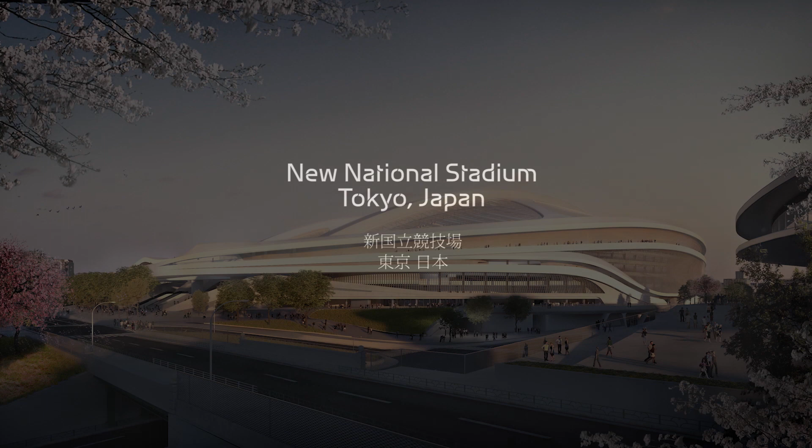One of the first shows we had done was in Japan 30 years ago. I think the stadium project is a very important project for Tokyo because that was done as an international competition, which we won. It was a very serious team of people, engineers and architects, who looked at this project for 2 or 3 years, so it's an enormous investment.

I think it's a very important project because it has a life beyond the Olympics, it has a legacy life. The team is a credible mix of international architects with sports planning and Japanese experience. Zaha Hadid Architects with Arup Sport won the international competition to design the new national stadium for Tokyo 2020 Olympic Games.

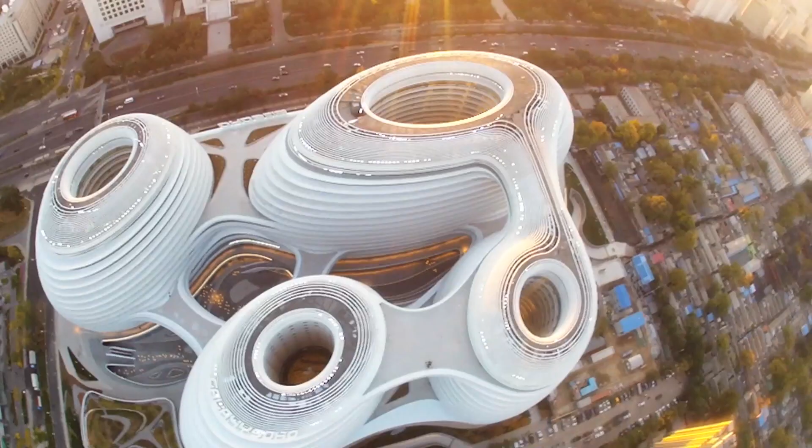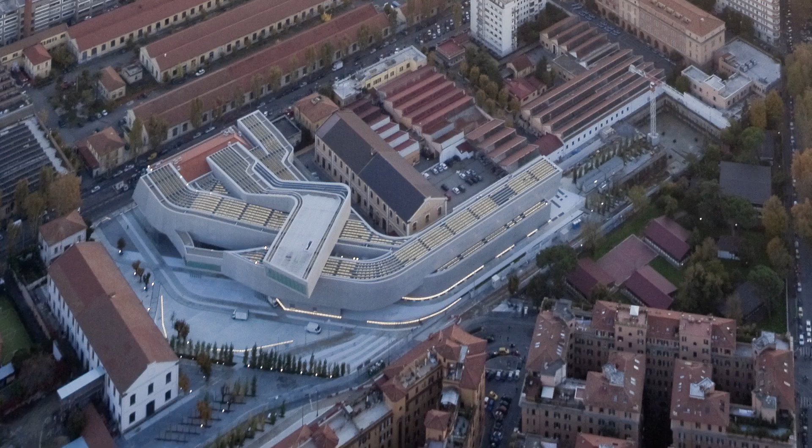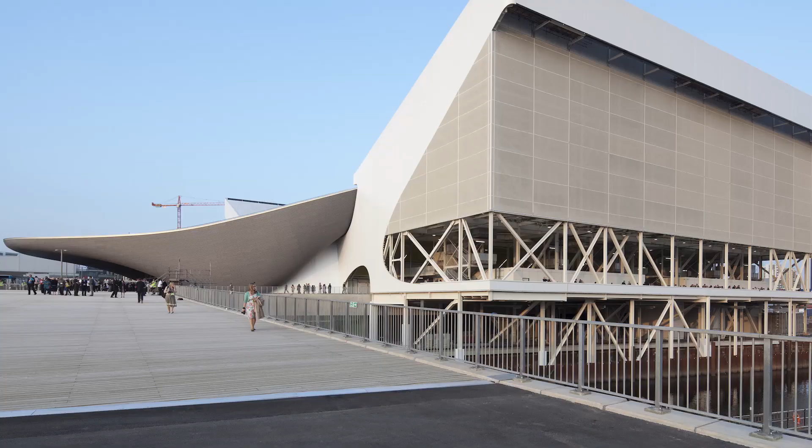ZHA have experience working successfully with clients to design projects which have been built on time and to budget. ZHA designed the London Aquatic Centre for the London 2012 Olympic Games. The project was successfully redesigned to achieve a revised budget. The design used a mix of temporary and permanent seating to become one of the most successful venues of the London 2012 Olympic Games. The venue has since become very popular and well used by the public.

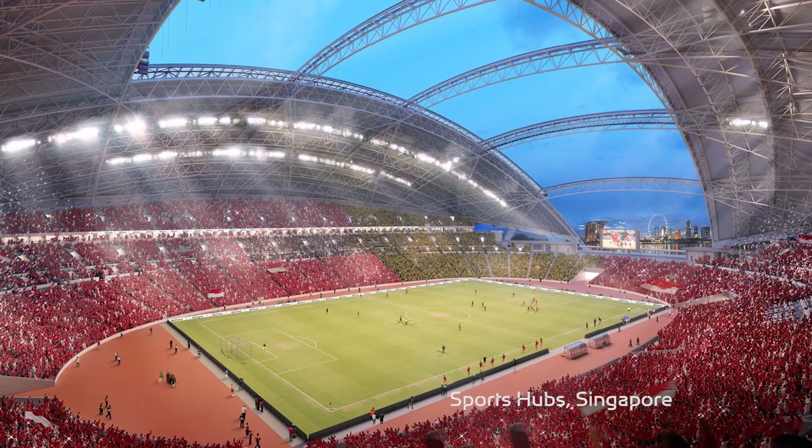Arup Sport have extensive stadium design experience, from the new multi-purpose stadium in Singapore's Sports Hub to the Beijing Olympic Stadium in 2008, the Allianz Arena 2006, and the City of Manchester Stadium 2002. We have been collaborating on the design with 4 of the largest design consultants in Japan, led by Nikken Sekkei. Between them, these Japanese offices have designed 3 of the stadiums for the FIFA 2002 World Cup in Japan.

The design was inspired by the past and future of Japan. The site is the site of the Tokyo 1964 Olympic Stadium, and it's an appropriate place to build a new national stadium which aspires to create a building that exceeds mere function to become a symbol of Japan's renewal and long-term optimism for the future.

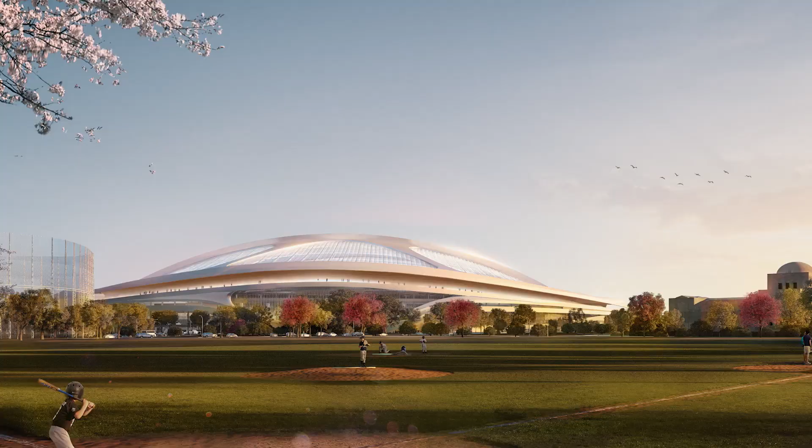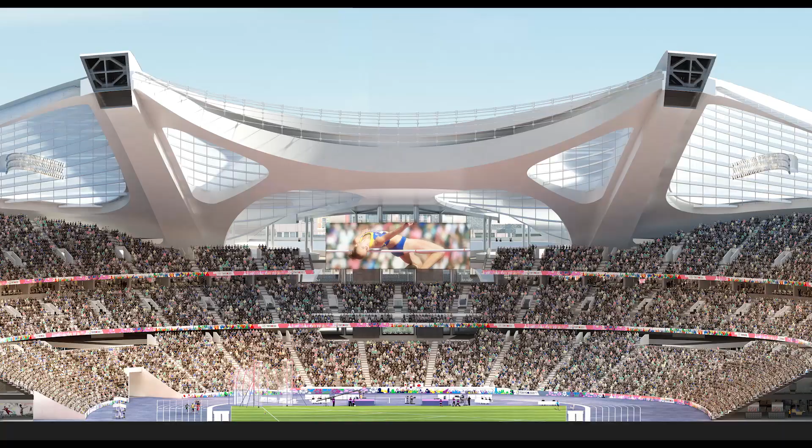The basic components of stadium design are extrapolated to connect the stadium to a specific context of Gaien and beyond to Japanese culture as an expressive but efficient design. The design is derived from the articulation of structure and circulation, where structure is required to create roof cover over long spans without columns, and circulation is required to safely move 80,000 people in and out of the stadium.

For practical reasons, the primary structure of 2 keel arches has a similar intent in silhouette and symbolism to traditional Japanese landscape bridges, so that the new stadium is based on a key motif from traditional Japanese landscape design and is an appropriate addition to the sports landscape of the Gaien area.

With cross ties, nature is further embodied in the design, where the expressed structure creates a distinctive flower petal geometry, so familiar in nature and to the Japanese public who have a close affinity to nature and the passing of the seasons. The flower petal geometry of the roof is continued into the facade, where the structure is not only expressed but inhabited.

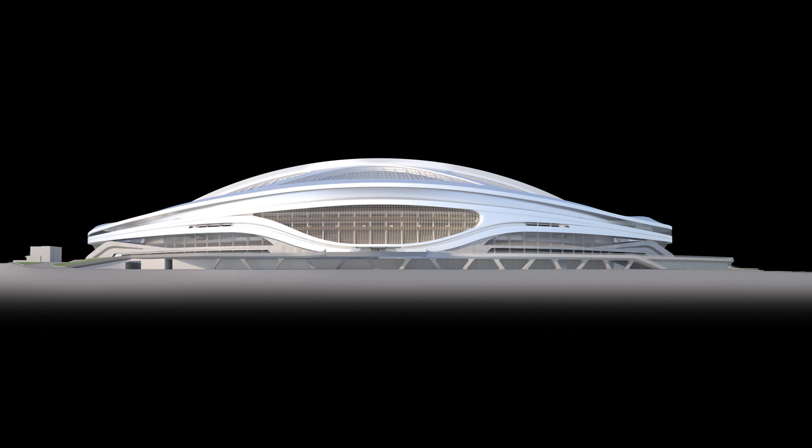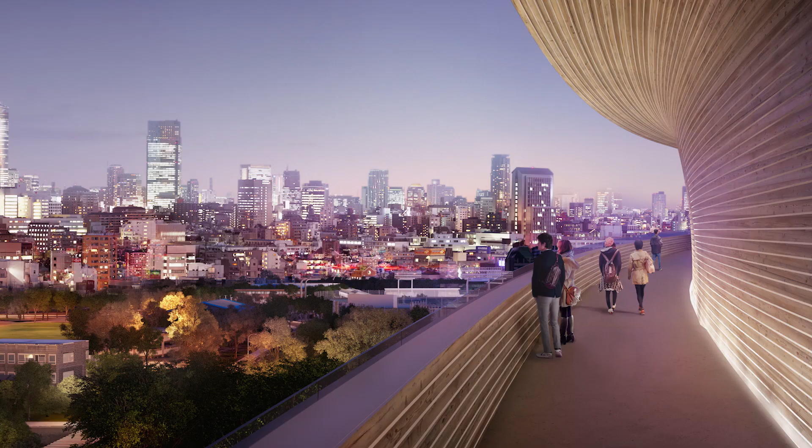A series of diagonal stairways and elevated walkways are developed into the envelope of the stadium so that it functions as a stadium on event days, and every other day it's an extension of the pedestrian landscape of the Gaien area, allowing extended walks and elevated views over Tokyo.

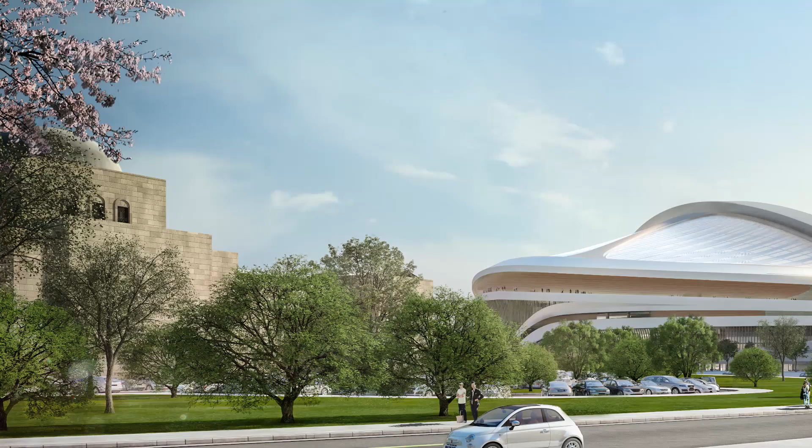All of these public walkways are lined with Japanese timber, giving a tactile familiarity to the stadium, which ties it back to the fundamental material of the Japanese environment and experience. The majority of the facade is broken down by the petal geometry and clad in Japanese timber louvers, so that the overall effect at pedestrian level is a subtle interplay of Japanese timber cladding, giving the visitor the experience of a direct resonance to the tree-lined landscape of Gaien and Japanese culture.

The majority of the roof structure is provided by catenary beams, which resonate with the innovation by Kenzo Tange with his catenary beams for the Yoyogi National Gymnasium. We aspired to make the new stadium connect visually and symbolically with this Japanese icon of optimism, so that Tokyo 2020 leaves Tokyo with a stadium as well conceived and as beautiful as this gymnasium from Tokyo 1964.

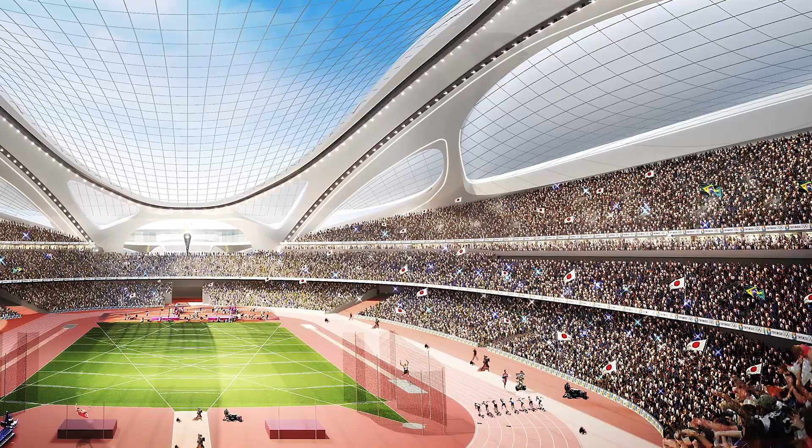The roof is covered in transparent, lightweight fabric. The roof allows daylight in, allowing good turf growth, whilst allowing spectators to experience the pleasure of daylight as they watch the events. At night, the stadium will glow and take on the appearance of a Japanese lantern. Together, the arches, catenary beams and lightweight fabric combine to create an overall effect that represents the traditional craft and modernist innovation of Japan, creating a renewal of the Japanese spirit of optimism for the future based on confidence in their past.

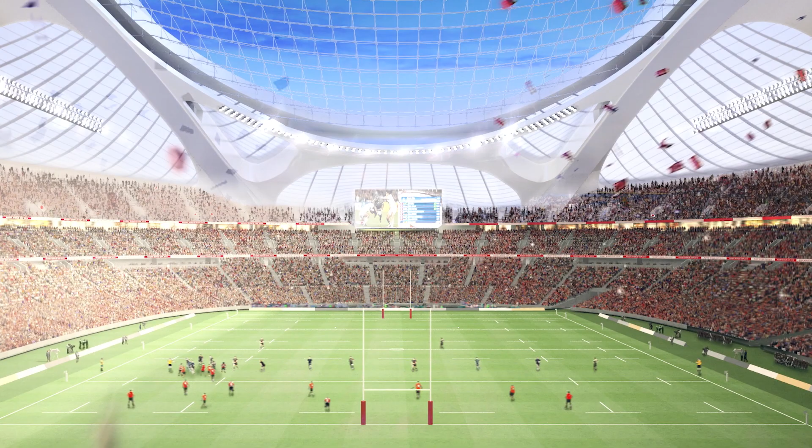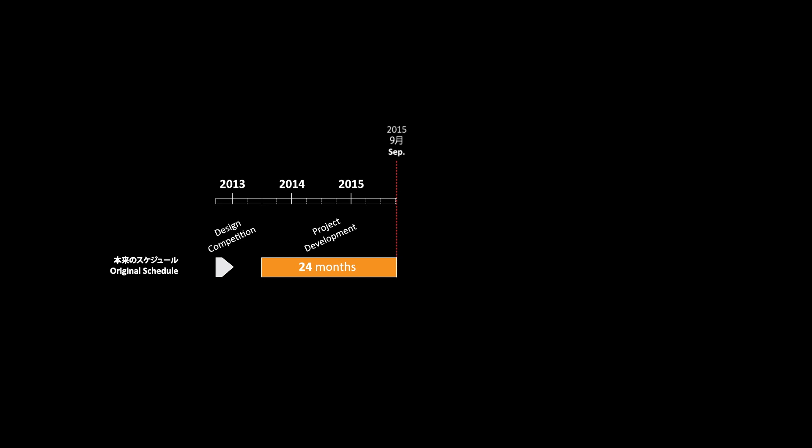Our new national stadium design has been 2 years in the making, and it is ready to start on site this year. It can be ready for the Rugby World Cup of 2019 and the test events before the Summer Olympics of Tokyo 2020.

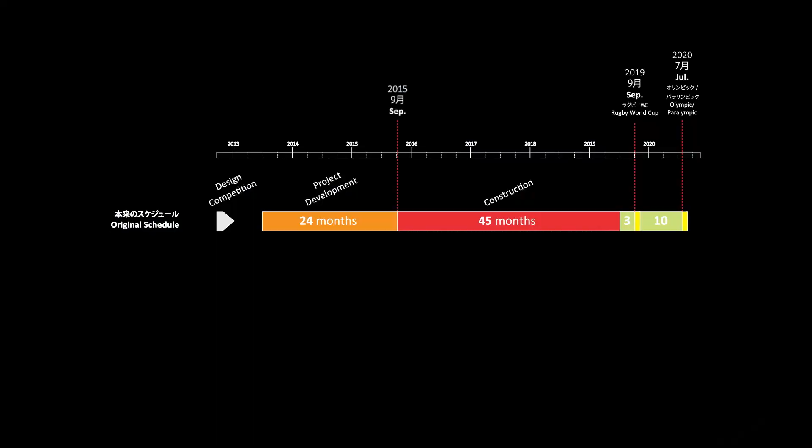To start the design from scratch is an unnecessary risk which we think the government should reconsider, if its aim is to achieve a lower price than 252 billion yen. We believe the answer is to introduce more competition between the contractors, but not to lose the benefits of the design.

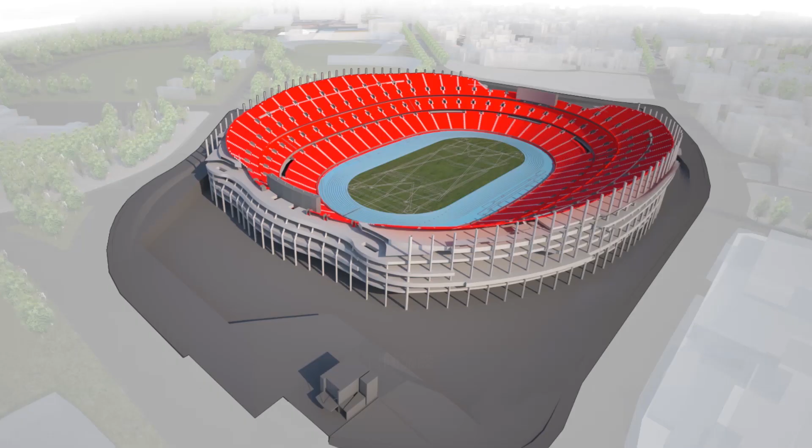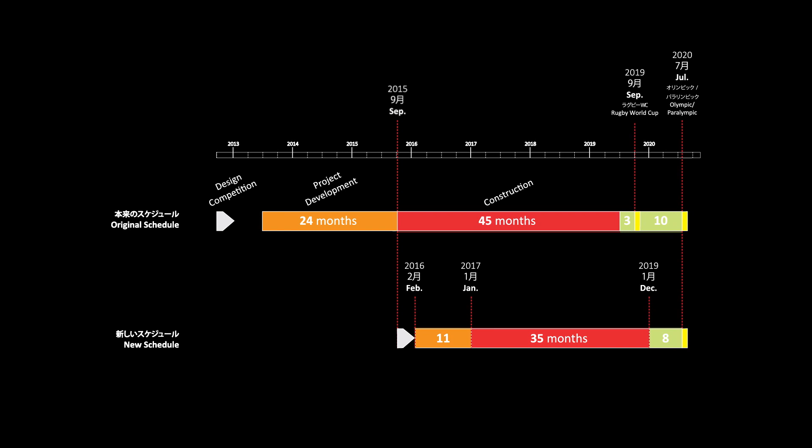The site is complicated, and the majority of the design will remain valid because the basic requirements of seating capacity and support facilities will remain the same. A new process should be used to get a lower price, but it should not waste the design work done to date. A new process will only allow a very short design period, and by the time certainty on design and price is determined, it will be too late. Instead, change the current design now to get certainty on costs.

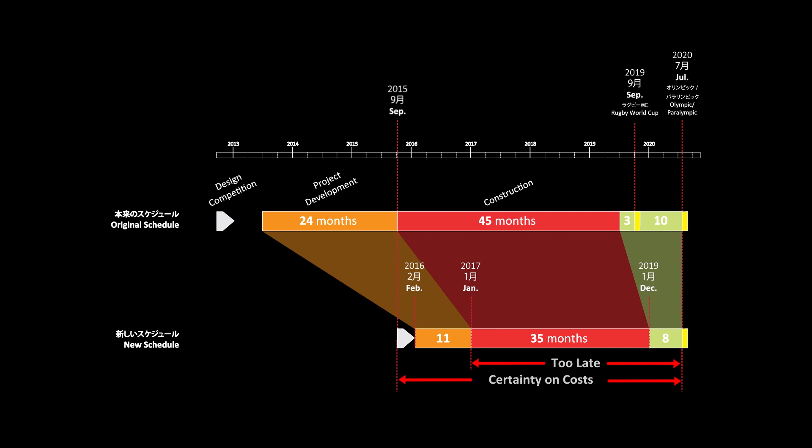A new process to find a contractor will result in the same limited number of Japanese bidders that competed for the project last year. Even if the tender is open to international contractors, only the 5 large Japanese contractors will be able to qualify or win the bid.

We understand that there are only 5 contractors in Japan who will have the necessary stadium experience and size of turnover to qualify to bid for the project.

2 of these 5 contractors worked on the project and produced the price of 252 billion. There is limited competition available, and this is the underlying issue to be tackled.

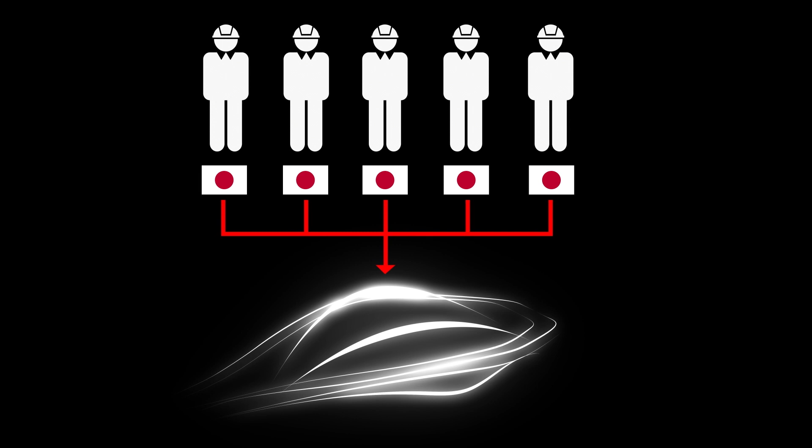We think the new process should concentrate on achieving competitive bids based on the existing design, with the option to provide cost savings to achieve the project on time and on budget. This way, the design is not wasted and the risk of failure to get value for money is avoided.

The current design is defined by the client's brief, which is an outcome of their legacy business plan, which needs to generate revenue from key stakeholders such as the J-League.

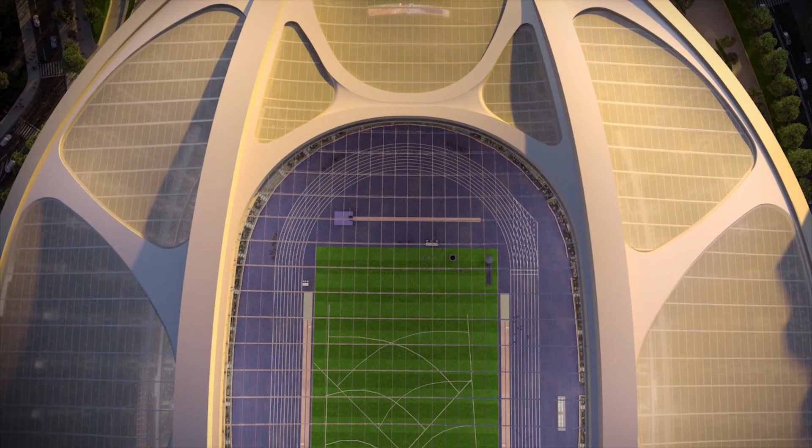For the past 2 years, the client's brief was for a multi-purpose stadium with an adjustable seating bowl which is able to switch sports modes between athletics or football, with an operable roof to close the roof opening and allow concerts.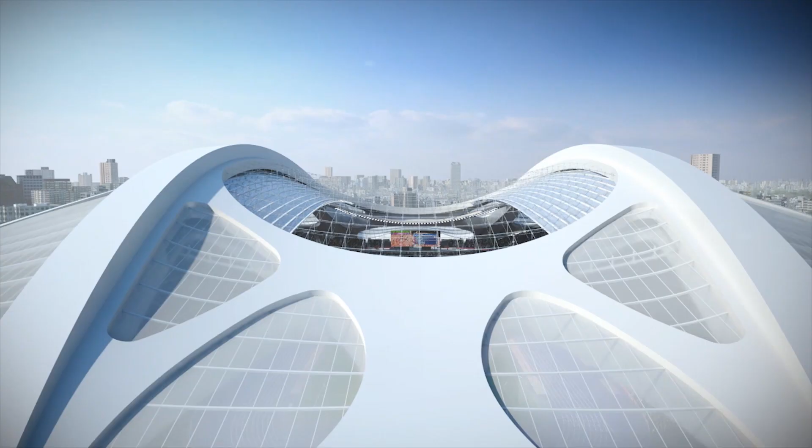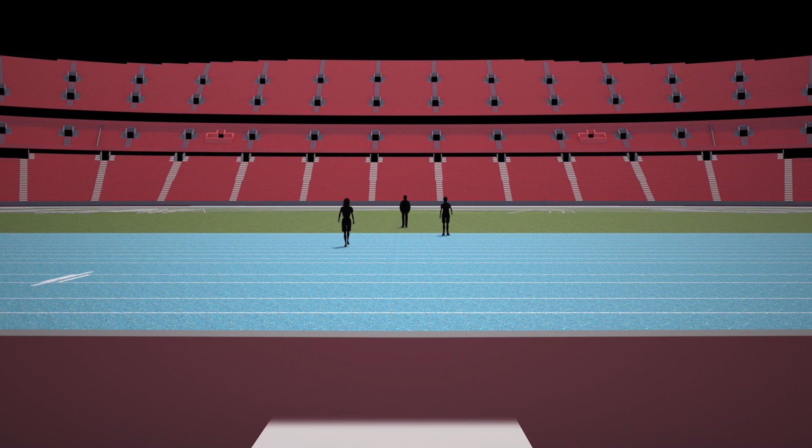If the government decides to change their brief to a fixed athletic seating bowl of 80,000 seats, it will not be sustainable. If football is watched from the distance of an athletic seating arrangement, it's too far away to create atmosphere and it will not be popular.

An athletics formatted bowl is not acceptable to FIFA and will not be acceptable to J-League for national football events. To be sustainable, the investment needs to be focused on long-term usage after the Olympics, and that means being able to accommodate football, which will be the largest user and revenue after the 2020 Games.

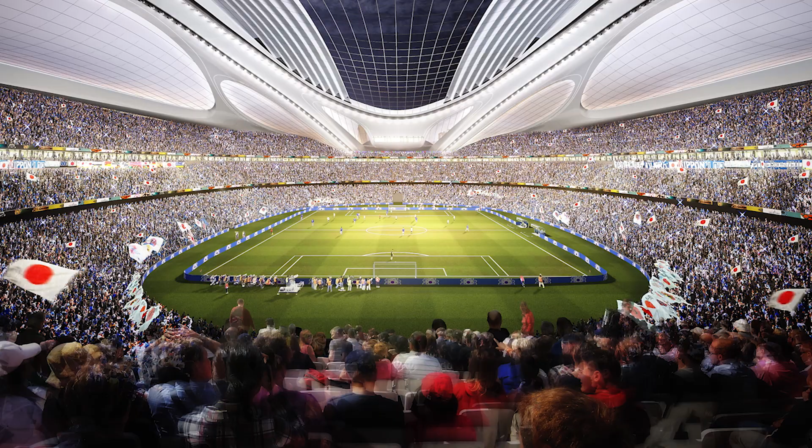There are many options available to achieve this objective, but there are certain key parameters to stadium design which we think need to be understood.

To illustrate these parameters, we will use a cross-section of the stadium which encapsulates the basis of stadium design. It's important to understand that the size and volume of stadium enclosure is not only determined by the seating capacity.

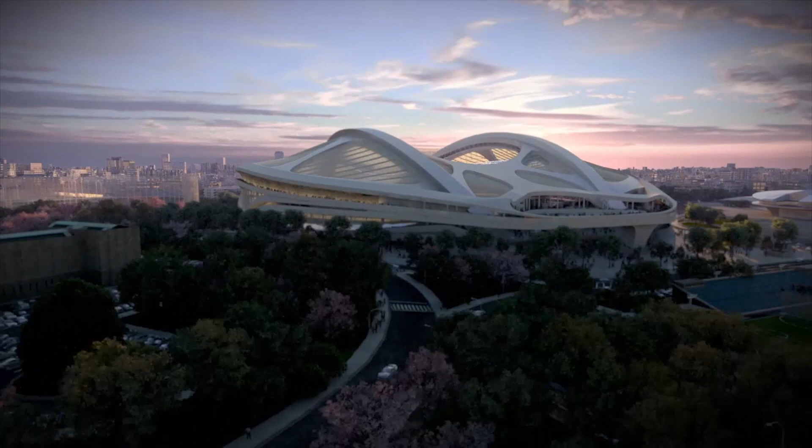There are other factors which will need to be incorporated in the new stadium, regardless of its seating capacity. And these factors also determine the size, cost and sustainability of the stadium.

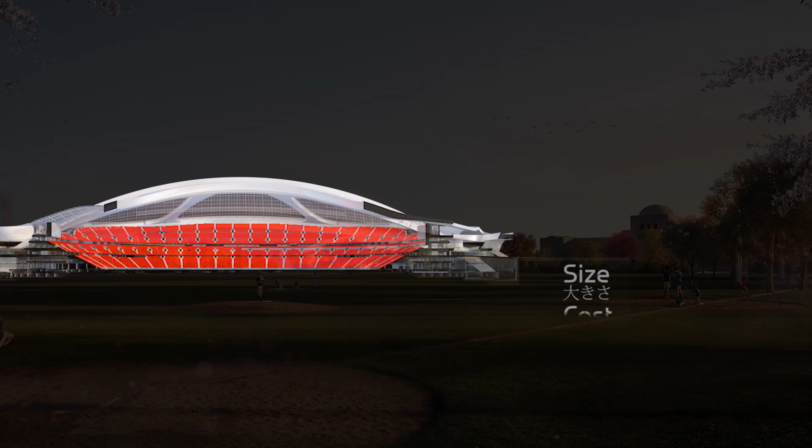To host the Olympic Summer Games, television requires high-definition lighting to be able to broadcast. This requires the stadium to incorporate lighting at a height of 50 meters surrounding the field of play.

It's a large field of play with many track and field events occurring in different locations. Each of these events needs to be lit to the same high standard. The lighting also needs to work for football, which is a different and smaller field of play.

This requirement means either above or below the roof, an extensive gantry needs to be built at a height all around the field of play. Regardless of seating capacity, this lighting is required.

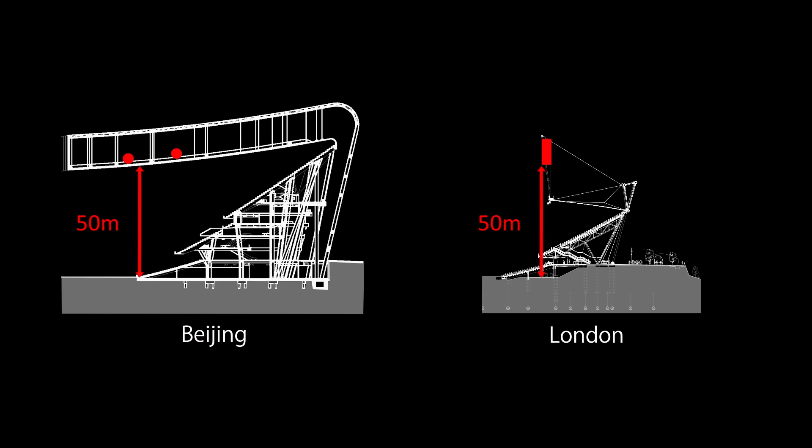The extent of roof cover over the seats is directly related to the amount of seats. Its fundamental purpose is to protect spectators from the weather. In the case of Tokyo 2020 Olympic Games, the weather is hot and humid, so the roof should provide as much solar protection as possible to make the spectators comfortable.

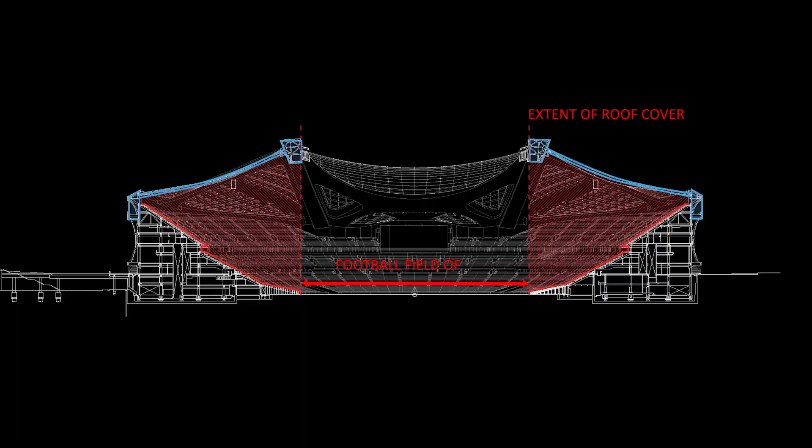If the stadium is to work for football, the extent of roof should be determined to cover all of the seating in football mode. Building a roof once to work for athletics and football will result in the best return on the investment and mean the stadium is sustainable in the long term.

Any stadium will host a limited number of events in any year, and stadiums are difficult to make work as a business. For the new national stadium, it was projected it would only host 40 events, including 10 concerts in any given year.

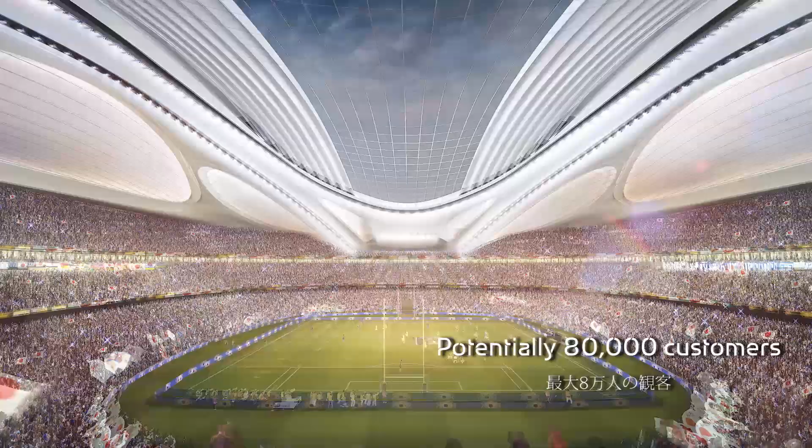There are potentially 80,000 customers at any event, so it's imperative that the stadium design maximizes the amount of revenue that it makes at each of these events.

In modern stadium design, this means more dining facilities within short travel distances to increase the duration of stay and spend by spectators at any single event.

This means that in addition to the fixed seating, there needs to be facilities in close proximity to all seats to ensure revenue is generated. The current design is designed on this basis, and it should be retained to be sustainable not only in terms of usage but also revenue generation.

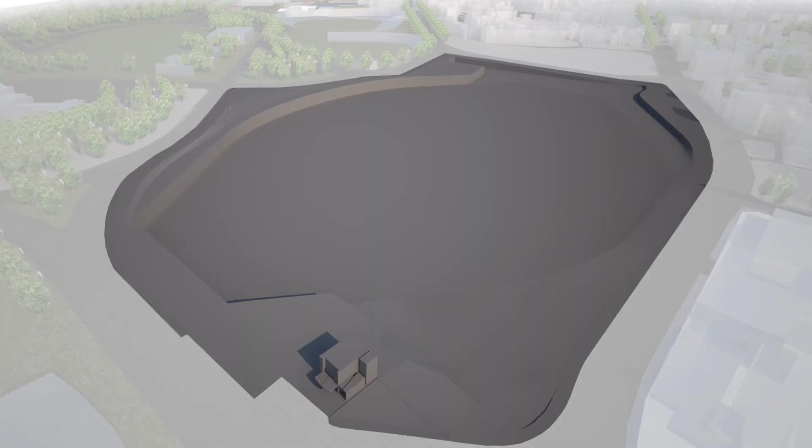The site is a very constrained urban island site, surrounded by roads on all sides, with extensive level differences to navigate and height limitations for any development. The complexity of fitting the field of play and seating bowl on the site, along with arranging level access in multiple directions, means there are very few design options available.

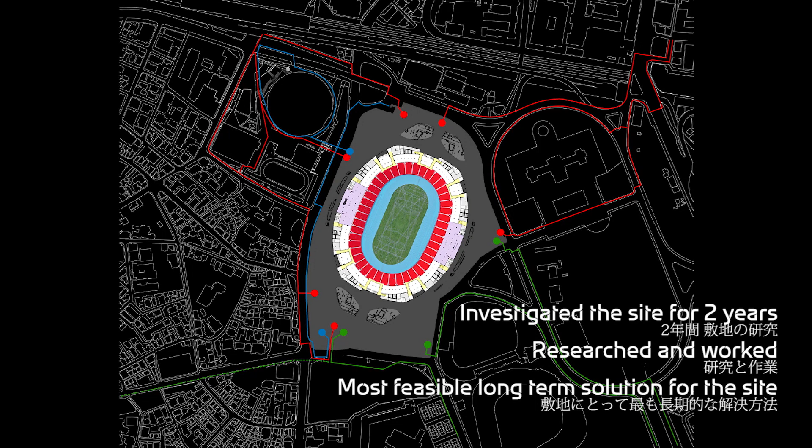Our current design is optimized for this particular site. Having investigated the site for 2 years, we have researched and worked to produce the most feasible long-term solution. The site area is small, so the design has been optimized to create as much external precinct area as possible for crowd flows, by allowing the non-ticketed concourse inward to create a compact footprint and safer site for crowd management.

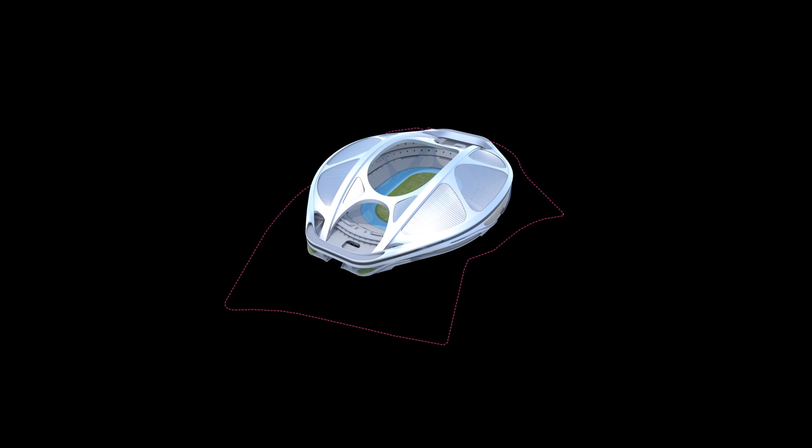We have tested many bowl options, including the use of temporary seating. We proposed an option in 2013 to the client to achieve some of the 80,000 seating capacity by using temporary seats. This option was rejected at the time, as the client's brief was and remained to have 80,000 permanent seats in legacy. We know from direct experience in London 2012 that mixing temporary and permanent seating on a constrained site is difficult, and it is not a way to save costs.

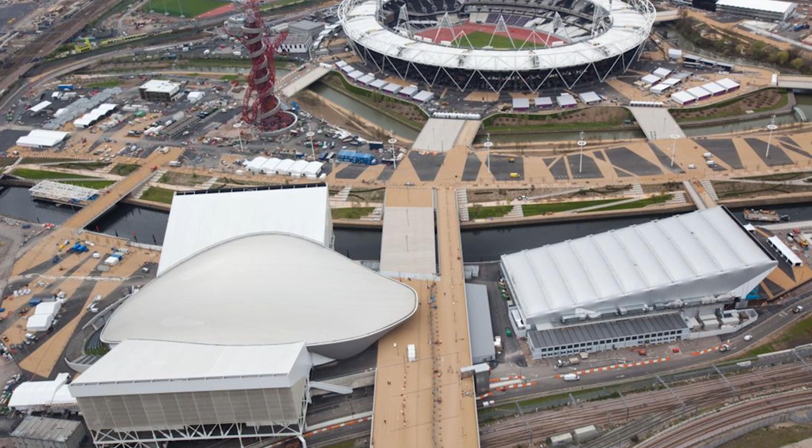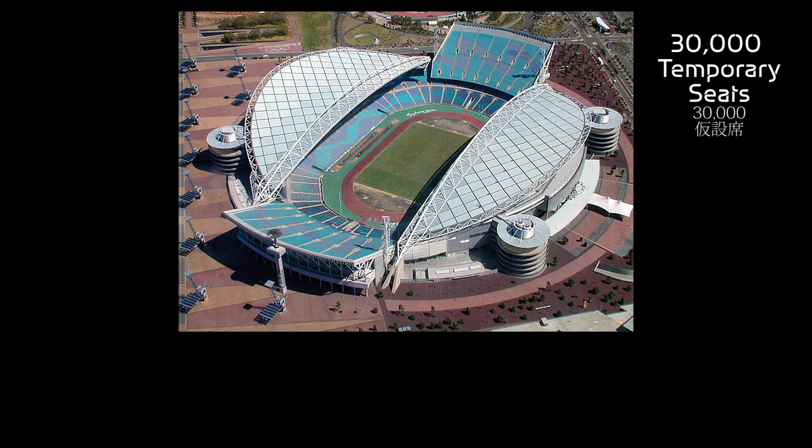It is a valid option if the long-term objective is to achieve a lower permanent seating capacity. This is the reasoning behind the success of the London Aquatics Centre, which was reduced from 17,500 in 2012 to 2,500 after the Games. The Sydney Olympic Stadium used 30,000 temporary seats. Although conceived as temporary, they were built to similar standards as permanent stands to achieve compliance with code. They took a significant percentage of the overall construction budget and took longer than anticipated to convert to the legacy stadium format after the Games.

We should learn from London and previous Olympics on the use of temporary seating. The reasons for choosing this option need to be determined not to save costs or time, but to satisfy the long-term business plan after the Games. The option remains possible with the current design, and the keel arches of the current design are similar to the structure designed for the same purposes in Sydney.

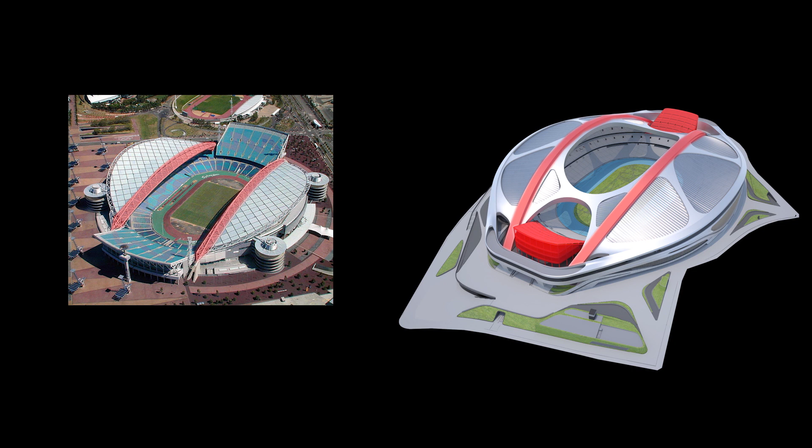We have developed the design to turn the requirements of the brief and site into benefits for the local community, Tokyo and the nation as its national stadium. To start, given the site constraints in size and height, we have produced the most compact bowl footprint possible for a multi-purpose stadium design.

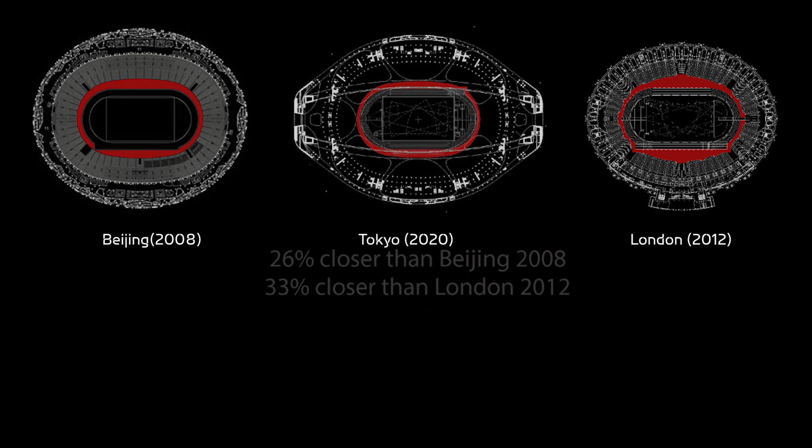Using Arup Sport's experience of previous Olympic stadium design, the design achieves a more compact design to fit the site, allowing more space for safe passage on the precinct, whilst achieving better proximity to the field of play and better quality of view for all spectators, by comparison to the previous Olympic stadiums of Beijing in 2008 and London in 2012. The compactness of the design has brought spectators significantly closer to the action in both athletics and football formats and provided them with an enhanced quality of view when compared to London and Beijing. The result is a very efficient, sports-focused stadium design optimized for this specific site.

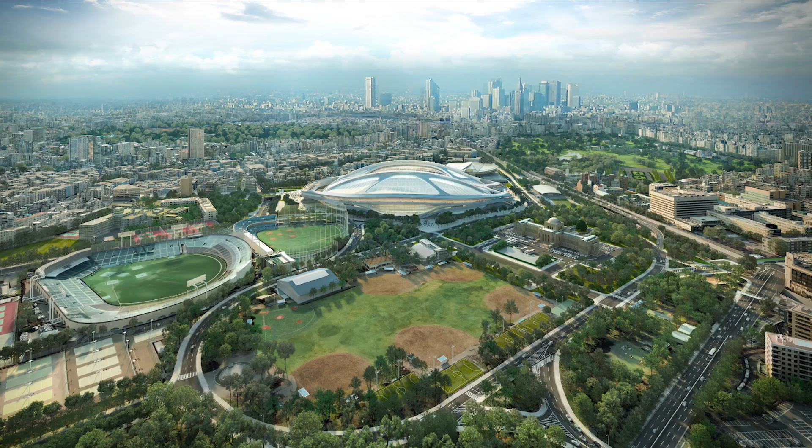We have been aware since our competition submission in 2012 of the sensitivity of the site location with respect to the size of the stadium. This is why we proposed a saddle seating bowl as opposed to a flat-top bowl. A saddle seating bowl is shaped like a saddle, meaning it has a varying height, and its benefits are twofold. The first is that it allows the majority of seats to be positioned in the most popular location along the middle of the field of play and requires fewer seats at the ends. The result is more seats that are easier to sell.

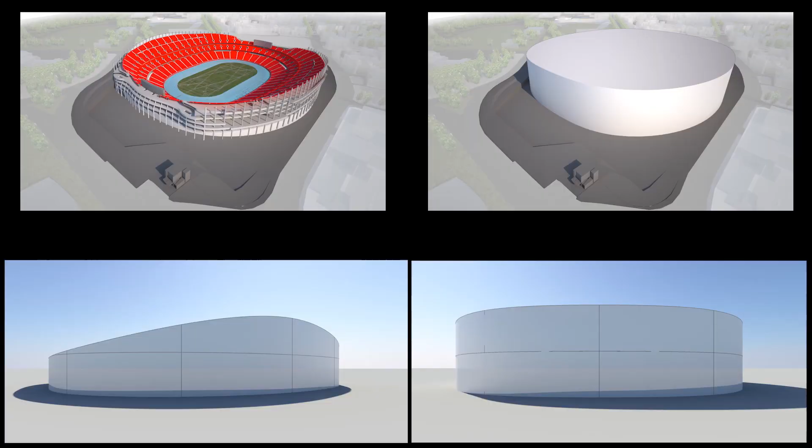The second advantage of the saddle bowl is that externally, the pedestrian perception of the stadium is much reduced, where the inclined elevation comes down as low as 24 metres and rises to a height of 44 metres, so from most viewpoints it will look and feel lower. By comparison, a flat-top bowl would be a constant height of approximately 40 metres, which from all viewpoints will look and feel like a wall 40 metres high.

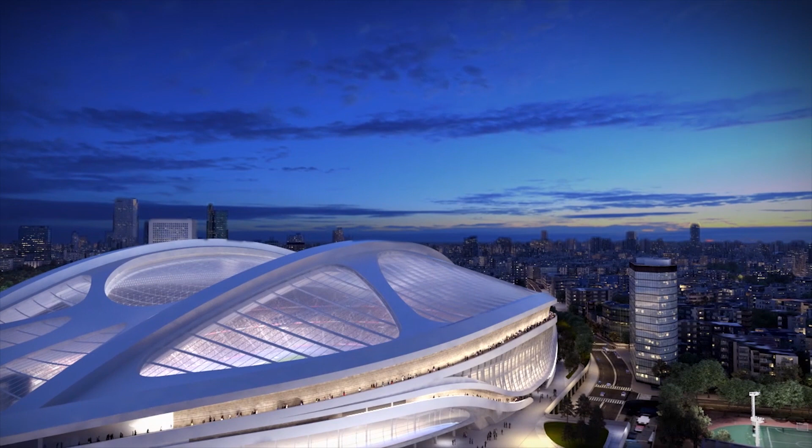The saddle bowl profile allowed the development of a unique additional public feature, the Sky Bridge. This feature is not essential to the stadium's functionality, but it's a gift to the public realm of Gaien. The Sky Bridge is an elevated walkway following the saddle bowl profile. It allows daily usage of the stadium with elevated views, connecting it into the daily walks or runs of the public in the Gaien area. The Sky Bridge will be open every day, creating more direct access with the stadium than its event schedule. It was intended to allow the stadium to become a more used part of the city fabric on a daily basis and more integrated into the promenade culture of the Gaien area.

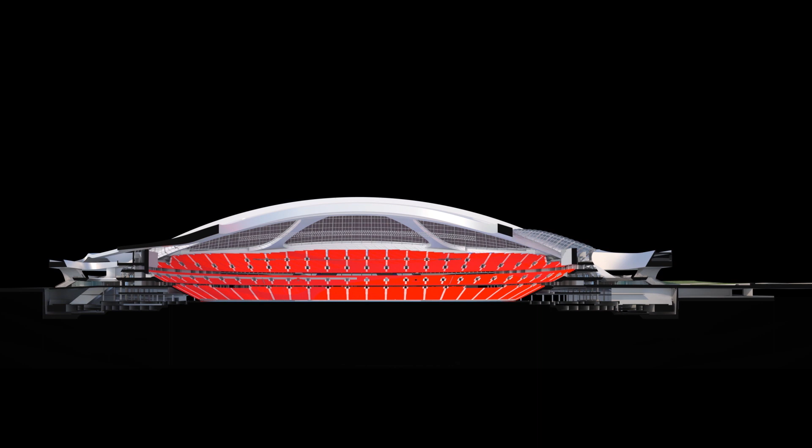With our experience of previous Olympic deadlines, it was clear that the stadium design should have advantages in saving construction time. We propose keel arches which span the longitudinal direction of the field of play, create column-free views, and rest on the ground. As they rest on the ground, the arches can be built in parallel to the seating below.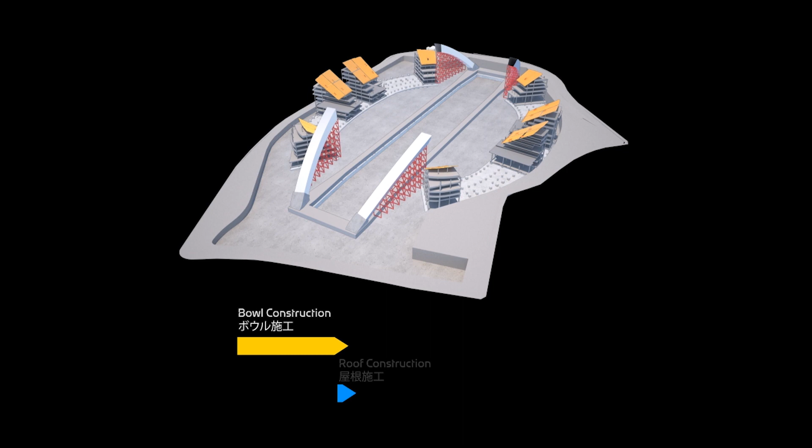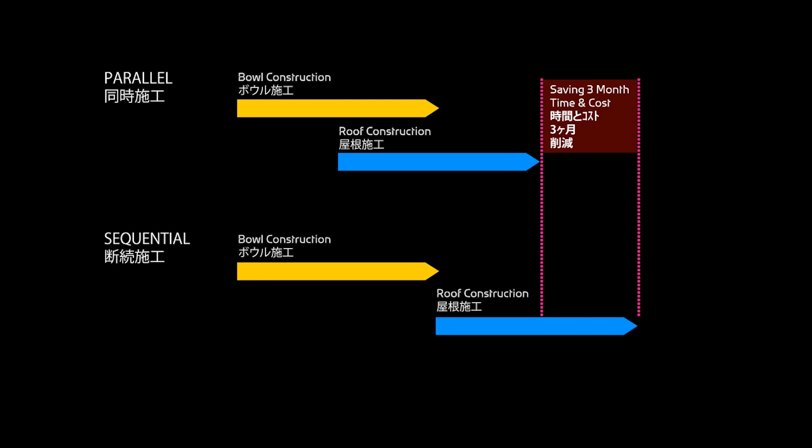We believe this approach will save 3 months in construction time compared to a sequential build of bowl first and then the roof. This time saving will be critical in achieving a fixed deadline, and it will have cost-saving benefits as well. This design benefit did not materialize in the joint venture bid, but it remains possible under a new bidding process. The efficiency and cost of the keel arch design can be measured by comparing its tonnage to other stadium roof constructions of similar span lengths and seismic conditions as Tokyo. We undertook these studies, and the keel arch is an efficient and cost-effective solution with many benefits.

Before defining a new budget for the stadium, the current price submitted by the contractors should be better understood. It was not the price of the design as we have described, it was a price based on considerable omissions from that design. The price of 252 billion yen did not include the operable roof, nor the moving seating tiers, and only a partial enclosure of concourses. It was therefore already the market price of a fixed athletic stadium of 80,000 permanent seating.

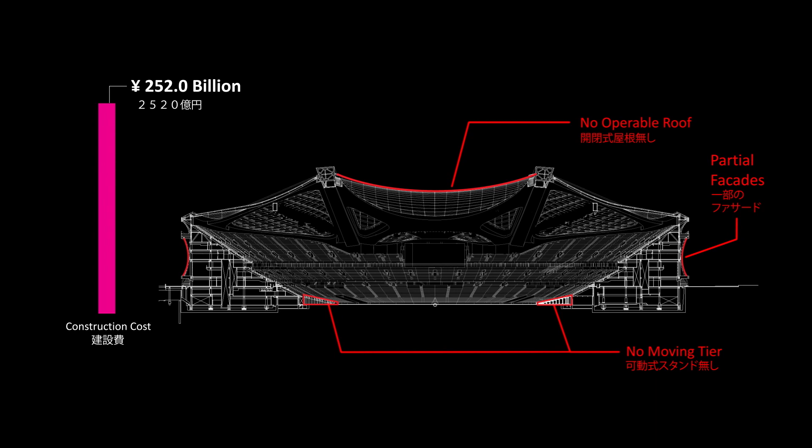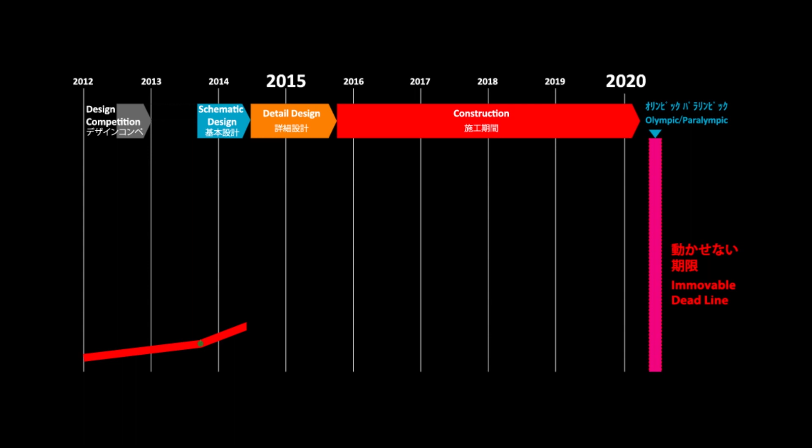Save for the Sky Bridge, 252 billion yen is the current price in Tokyo for a basic 80,000 stadium on that site. A new process needs to change the market conditions in Tokyo, not the design. It should also be understood that the immovable deadlines, such as the Olympics, combined with a limited competition in the marketplace, create inflated prices. The determining factor in the price is the market and the demand on materials and labor. The design is not the determining factor in these circumstances. Rather, the design should be seen as the only way to achieve value for money in the market.

Without a design as a contractual commitment as much as time and cost, there will be considerable risk to achieving value and return on the investment. The current design can be redesigned to achieve a lower budget, but it should be retained in principle so the Japanese public achieve this value from the market and they get a long-term return on the investment.

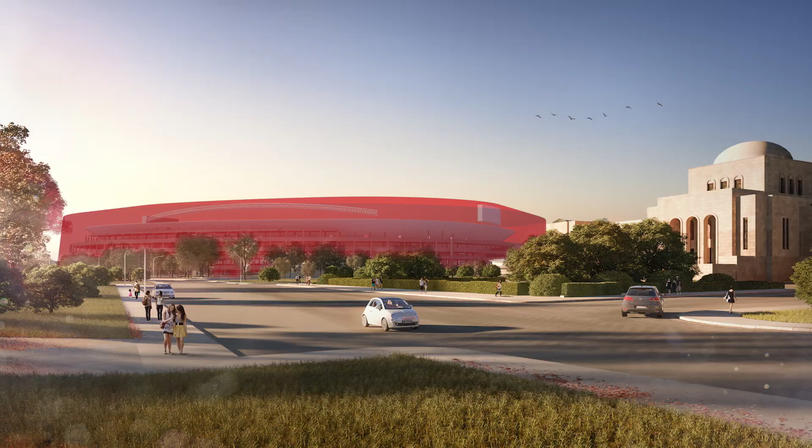Giving the design responsibility to the contractors means there is no real definition of value or quality except for a price and time schedule. A new concept design submitted with a price cannot be trusted after 5 months of design work. It takes much more time to determine a new design with complete price certainty, and by the time that certainty is achieved, it will be too late. The Japanese public will get less for their money with this approach. So why take the risk?

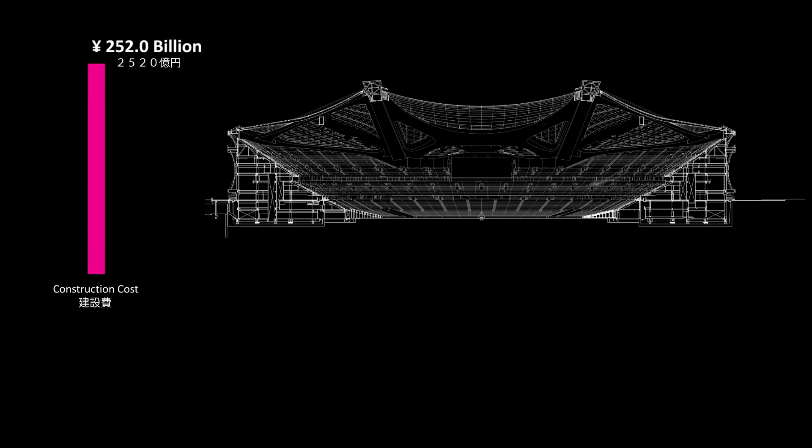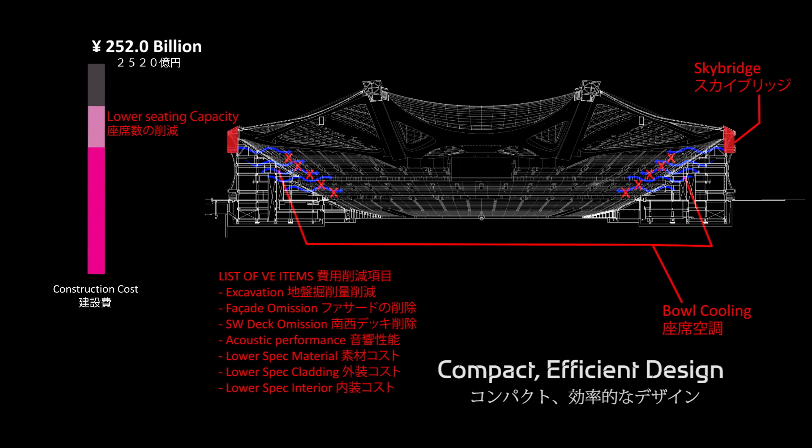There is a design which will achieve quality, and it can be changed to meet a new budget. Why risk everything when outcomes are so uncertain? Further cost savings can be considered, such as omitting air conditioning for the seating or omitting the sky bridge. But the stadium design is compact and efficient. It cannot be improved upon unless the fundamental criteria of seating capacity alter, or a more competitive bidding situation is created to lower the price.

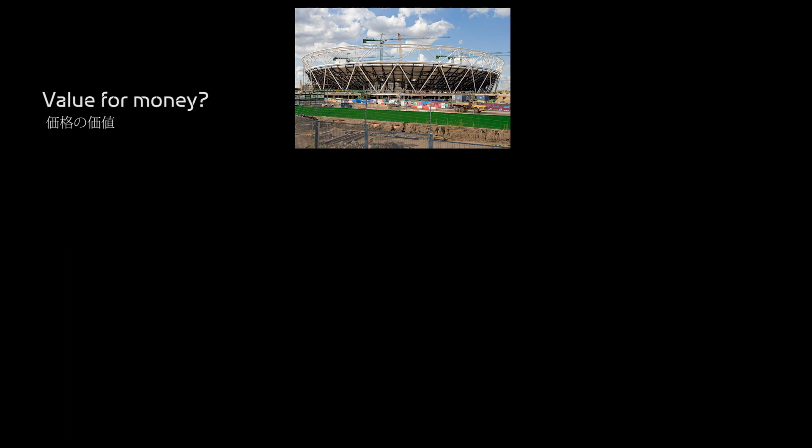Tokyo should learn from London 2012 and its Olympic Stadium. The London Stadium was design and build. As a comparative cost to the 252 billion yen price for the Tokyo Stadium, it cost 218 billion yen. No one can think that the London Stadium represents value for money. The design is very basic and the operation will be permanently compromised by its conception.

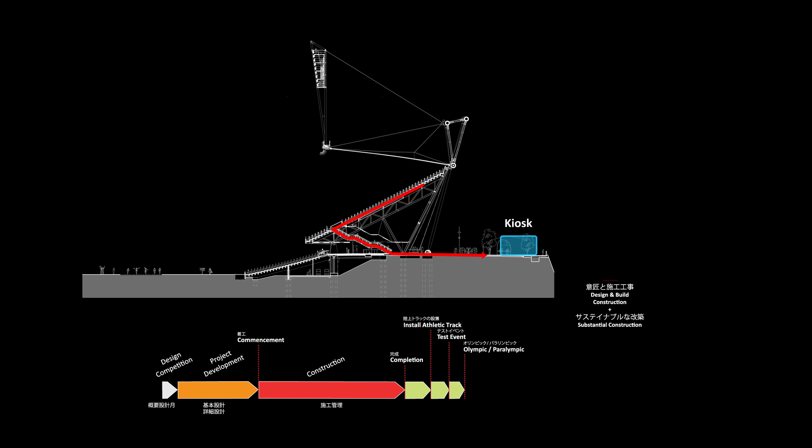It was built in 2012 as a fixed athletic stadium with 80,000 seating. The upper tier of 55,000 seats was supposed to be dismantled afterwards, so all facilities were placed on the ground with long travel distance. This mode cost 138 billion yen. After the Olympics, to make it sustainable, it needed to be modified to work for football. So a moving tier was introduced, the roof needed to be extended, and all of the steelwork needed to be re-welded. These amendments cost a further 70 billion yen, taking the total cost of the London Stadium to 218 billion yen.

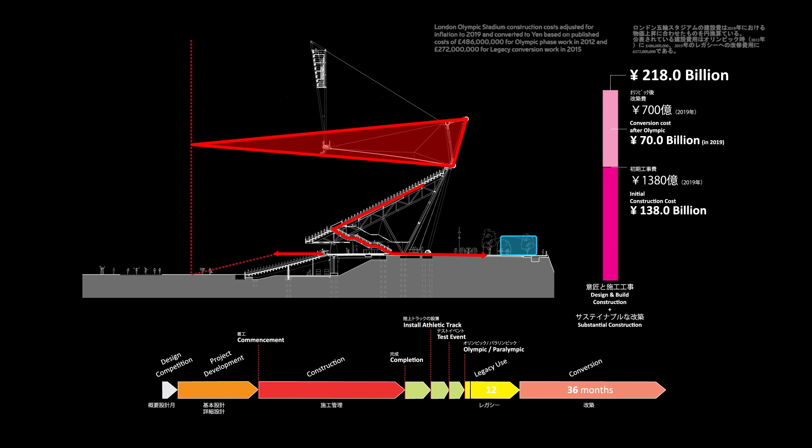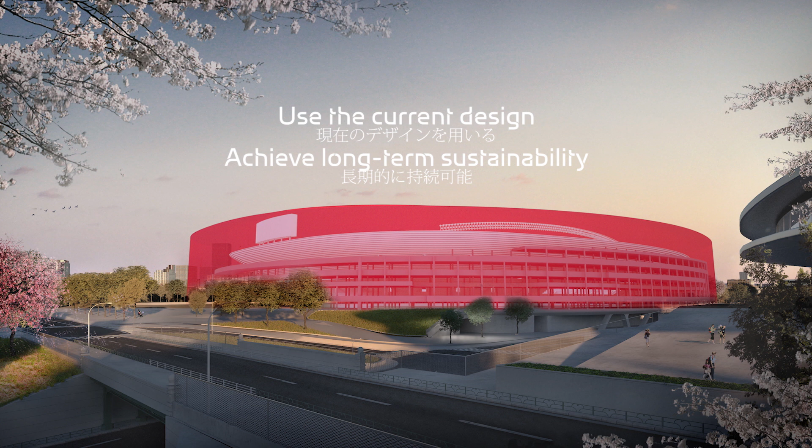It will remain a compromised stadium, designed only for athletics and adapted retrospectively to accommodate football. In football format, it will never generate the intensity of a true multi-purpose stadium bowl, and the extended travel distances to facilities from the upper tiers will make these seats hard to sell. Tokyo should avoid these mistakes and use the current design to achieve long-term sustainability and value for money from the market by using a design which is efficient and adaptable to change.

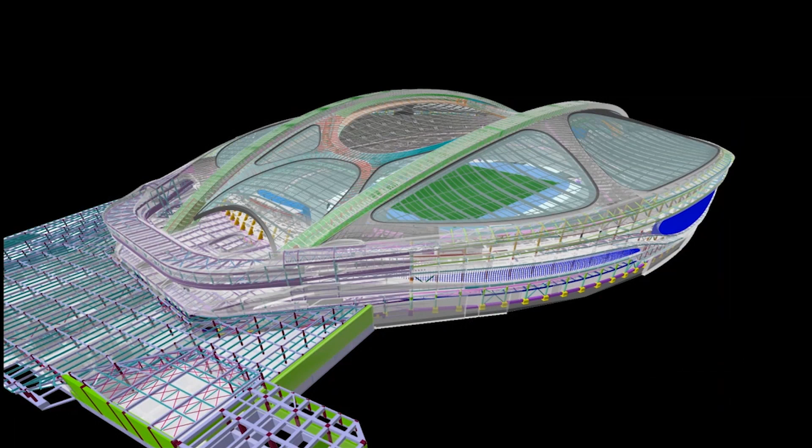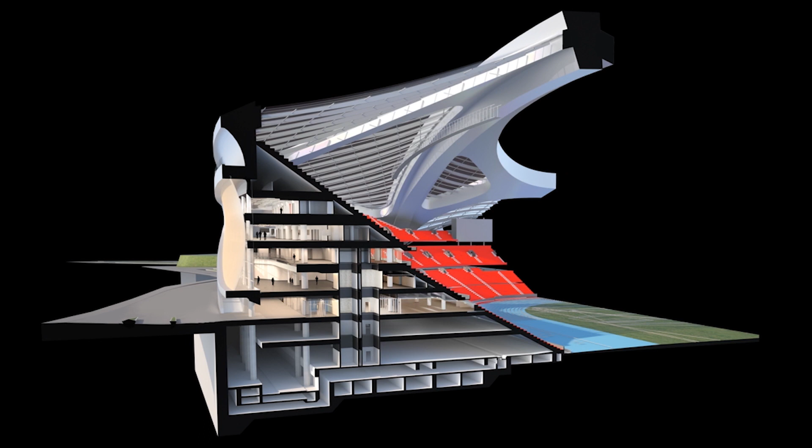We understand the need for the government to undertake a new process to get a better price, but it should not take an unnecessary risk on the design, and it will get more for the taxpayers' money by retaining the current design. It is a unique design which has been thoughtfully developed over 2 years to be not only beautiful, but compact and efficient for this specific and special location in Tokyo. The current design encapsulates all of the lessons learned from our direct experience of other Olympic stadiums. This knowledge and experience should be retained so that Japan gets a stadium fit to be called its national stadium.